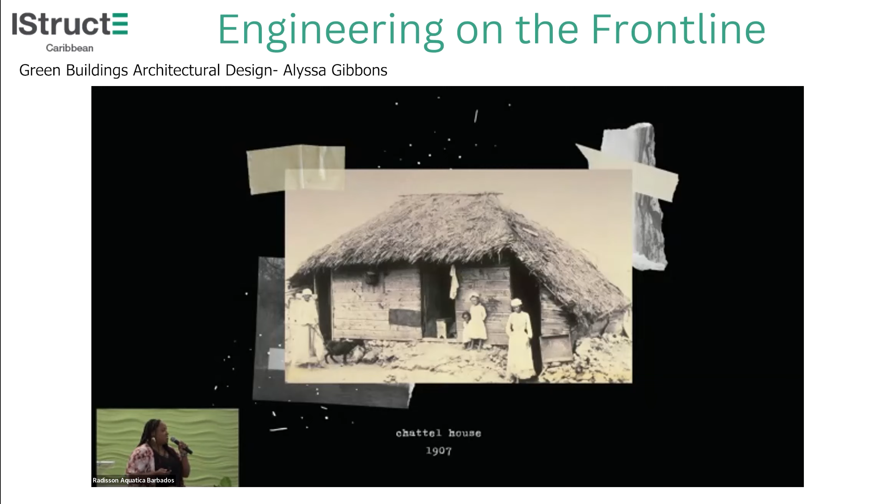Some of the earliest examples we have of these on the island are chattel houses. Originally, I think we're all aware of slavery etc, but what these houses represent to me is the absolute resilience of Caribbean people by nature. Faced with excruciating circumstances, they found a way to simply survive, right?

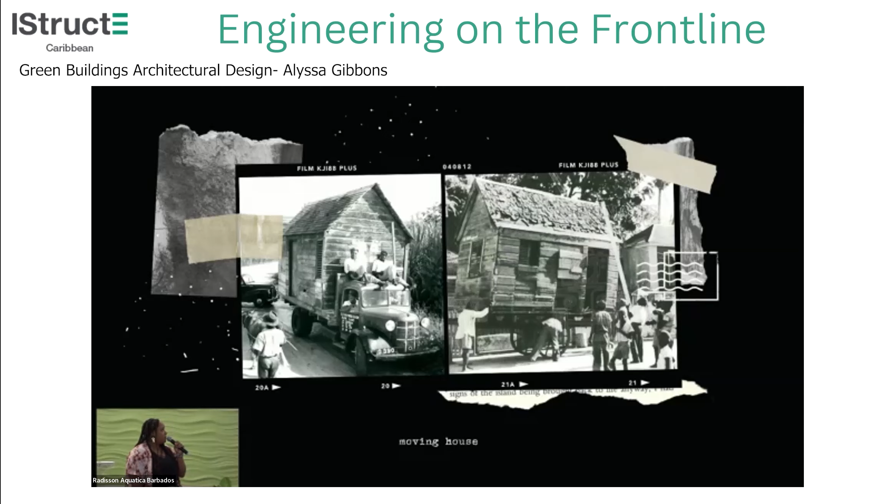Originally, these chattel houses had this kind of conundrum they had to deal with. They needed to withstand hurricanes, tropical weather, but in many circumstances, after the abolition of slavery, they needed to be movable. It's one of the earliest typologies of movable tiny home. You needed to be able to call a friend and pack up and leave if you were in danger. So how do you marry resilience and robustness against weather, but still have that kind of flat pack mentality and ability to move at a moment's notice?

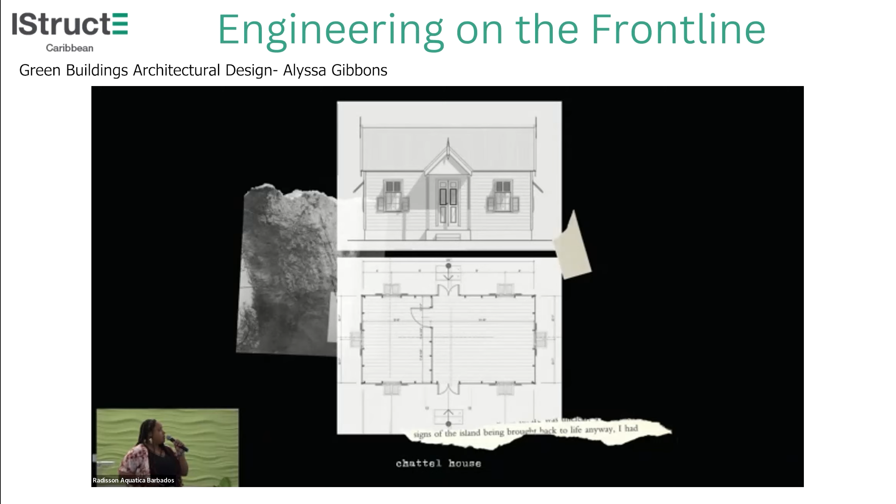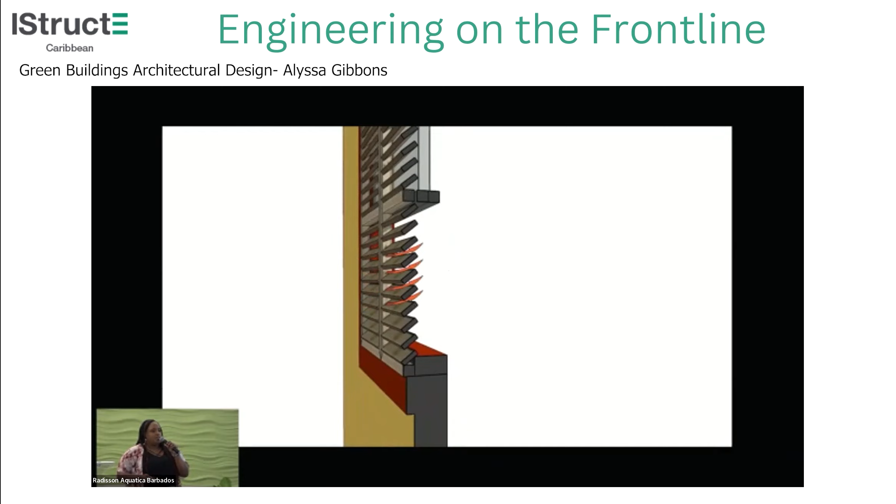Well, as many of us probably know, the answer lies in the arrangement of the timber facade, with windows and door openings and louvered apertures that allowed wind to actually enter the building. So by arranging these openings in a symmetrical way, you'd literally be able to open up the house to the elements and allow the strong forces of the wind to pass through. So like I said originally, it's about not trying to defy nature, and in many cases where they simply didn't have resources to withstand nature, they simply made some compromises and allowed nature to enter.

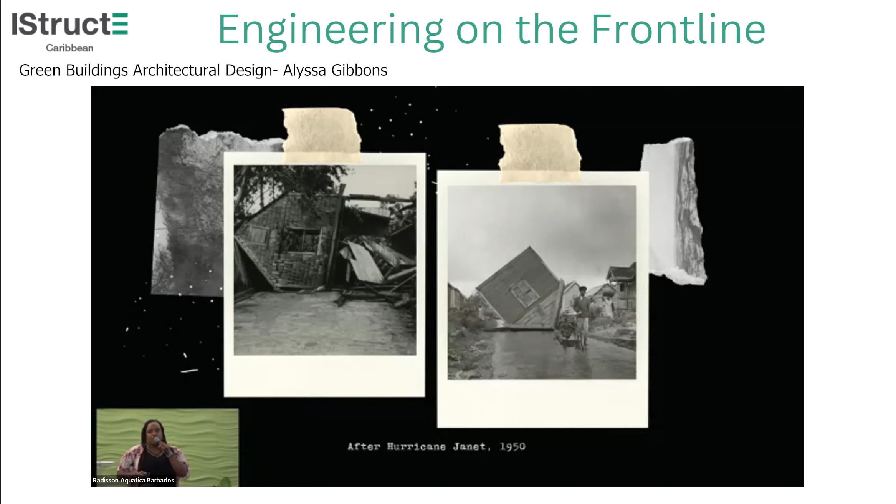So if that ability to work with nature rather than against it is the first rule of sustainability, then what is the second? I think for us in a Caribbean context, we cannot have this conversation of green architecture or green design or sustainable design without including resilience. For us in a hurricane-prone area, sustainability and resilience really do mean the same thing.

Case in point, drawing on these principles as a designer, doing your precedent studies, your research, there are opportunities that pop up where you get to integrate some of these design principles and understanding. This is a project that I'm going to talk to you about, probably my favorite project I've ever worked on, and it's located in Dominica.

I think when we think about green and sustainable, this is what we think about: flora, fauna, beautiful imagery of Earth at its best, but we also need to design for Earth at its worst.

Following on from, I think Ms. Alara mentioned Hurricane Maria in 2017, I was working in St. Kitts at the time, and there were a couple hurricanes in the area at the time. Working on St. Kitts, we got affected by one of them, and a lot of the islands around us were flattened, but luckily we were safe.

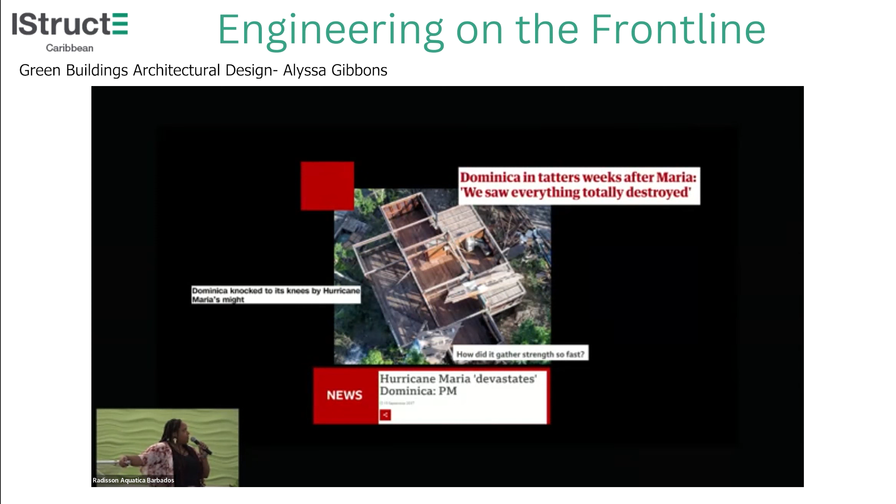So when I got there, I dived right in on site with the structural engineers, with the client, with the contractors, trying to understand what they needed, what didn't work, and how do we reimagine this space into something that could withstand another hurricane like that one.

I think this could have been done digitally, with drone and aerial imagery, with LiDAR to understand the rock face of the site and the tectonics of the area. But there's always that human aspect that you cannot digitize. So it was super important to go there and have the conversations on site with people with local knowledge and build a solution from that.

So some of these images here are just simple sketches done on site, either using somebody's helmet to press on, or the palm of your hand to sketch out ideas, alongside the client, alongside the structural engineer. Just coming up with ideas of how do we integrate simple design principles that are low tech, that the guys on site, the survivors of the area, can integrate into their architecture moving forward.

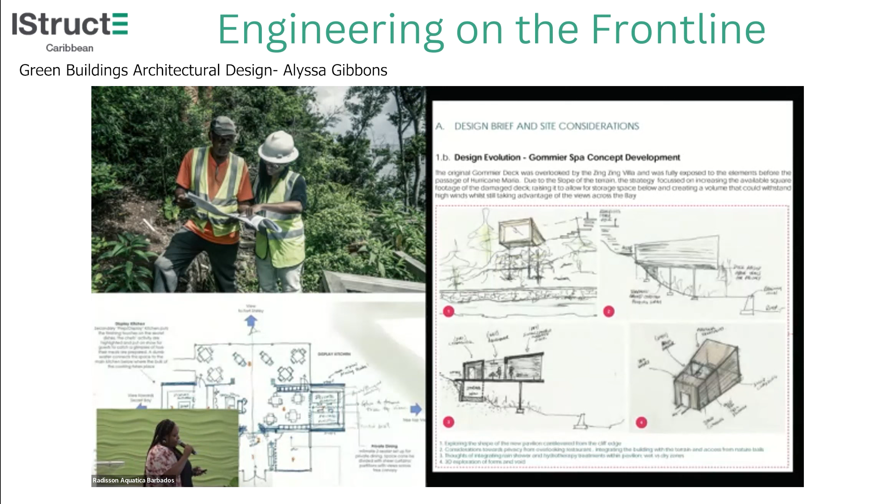So, Zing Zing Restaurant and Gommier Spa were two interventions that I led. Super simple, based on those ideas that we learned about traditional vernacular, this idea of letting wind into the building if you don't have the resources to shore yourself up against it. We came up with this idea of what we call a sacrificial core.

So in this building at the top level, we're talking about Zing Zing Restaurant here, we came up with the idea of having these two lockdown zones that were both watertight, structurally sound, and allowing the central core of the building that you see in the image to the right to take wind through the building in the event of high wind. So in the event of a hurricane, for example, the client would be able to take all of the furniture, place them into those lockdown zones, and bunker in the ground floor area that you see there, which would be kitted out with cold storage, bathroom facilities, etc.

I think one of the things that is becoming more prevalent now is lack of warning. Just last year, in July I believe, we had that freak storm where we lost almost 2,000 homes and we had no warning. So this ability to integrate resilience measures into simple buildings so that people can shelter in place is super critical.

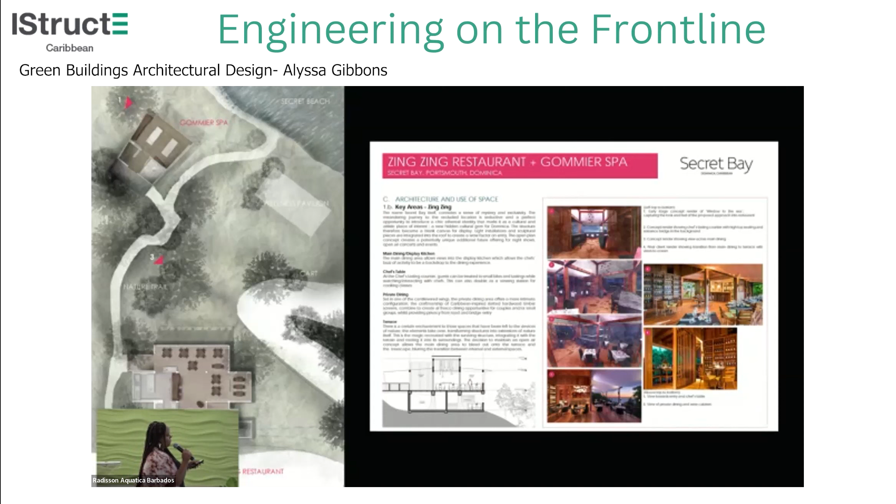Here we go, and in true architectural form, just some pretty pictures. But you can start to see here how we solve some of these issues: on the ground floor we had 2 cantilevered beams into columns. So it was kind of a 4-beam configuration coming into 2 columns, and the entire building cantilevered around that platform, with areas that jutted out into the surrounding tree canopy.

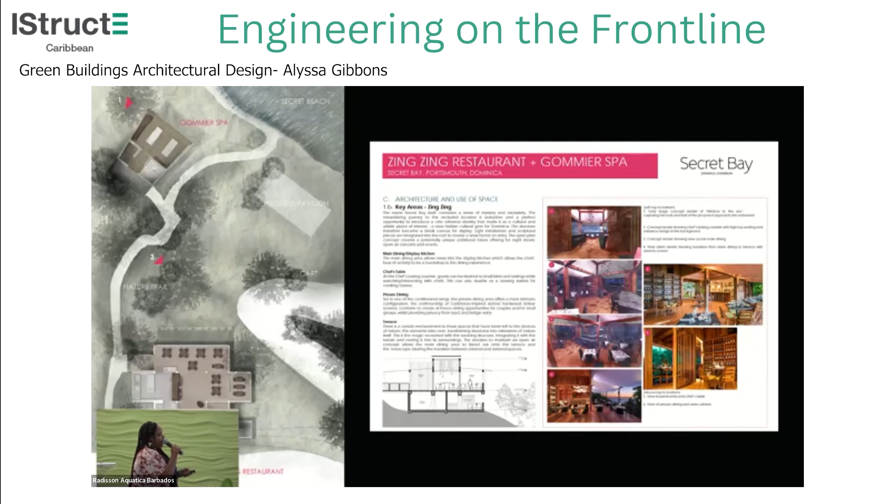And then in terms of air quality, natural ventilation, passive cooling, integrating that louvered element into the central core of the building so that as wind passed through, it had plenty of opportunity to get through the building, up and out of the building for cooling as well.

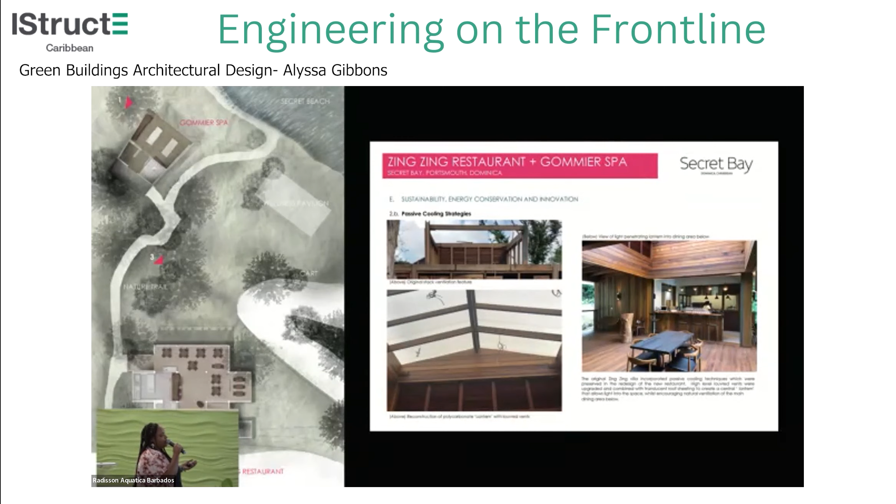And similarly, the spa building—the client really wanted to integrate some amenity spaces throughout the resort. So we walked the site with the structural engineer, choosing a location based on their knowledge of the rock face, examining, designing, pinning the structure back to the rock, and designing a simple cantilever solution. This was not about doing something super beautiful or stroking anyone's ego. It was about giving a tight footprint, something that worked and was elegant but still restrained.

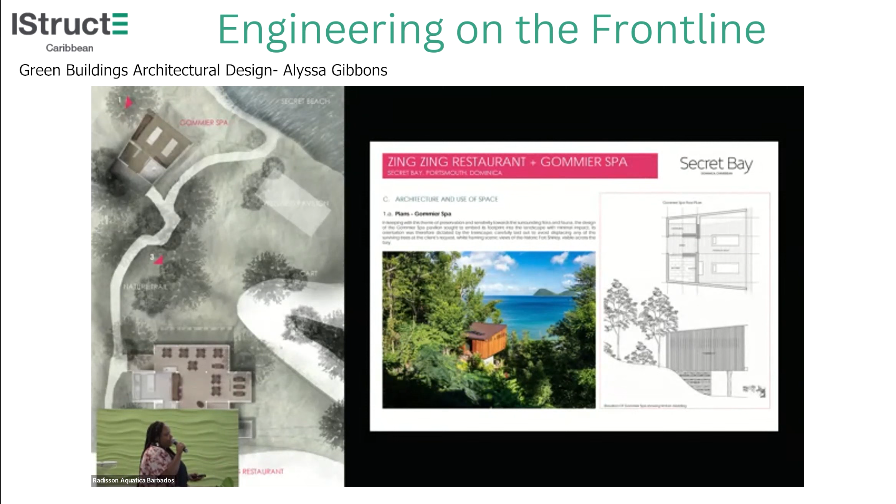Some more internal imagery, but you can start to see the solution at the bottom where we cut into the rock—again, a simple cantilever solution. Those two bunker spaces off to the top and bottom in the drawing on the far right allowed the client to store away any massage tables or amenities, and a bunker space at the bottom if they had high wind gusts or high rain and needed to shelter in place.

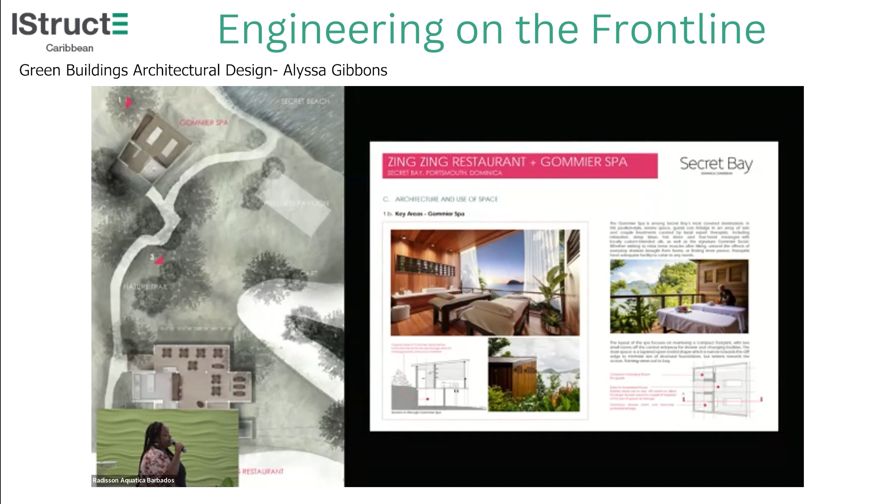Speaking more about materiality, I think something that goes untalked about sometimes is the greenness of a building and how we tackle that issue through use of materiality. Obviously after the hurricane there were a lot of felled trees, and we wanted to reuse them in some way, whether for cladded elements, structural elements, or simple furnishings within the space.

So we ended up using some of the timber for cladding. We used it for bar tops and even the hostess station within the restaurant. That in itself was an interesting exercise—climbing on top of these big trees and directing people exactly where to cut, people offering you things to smoke, and you trying to do your job.

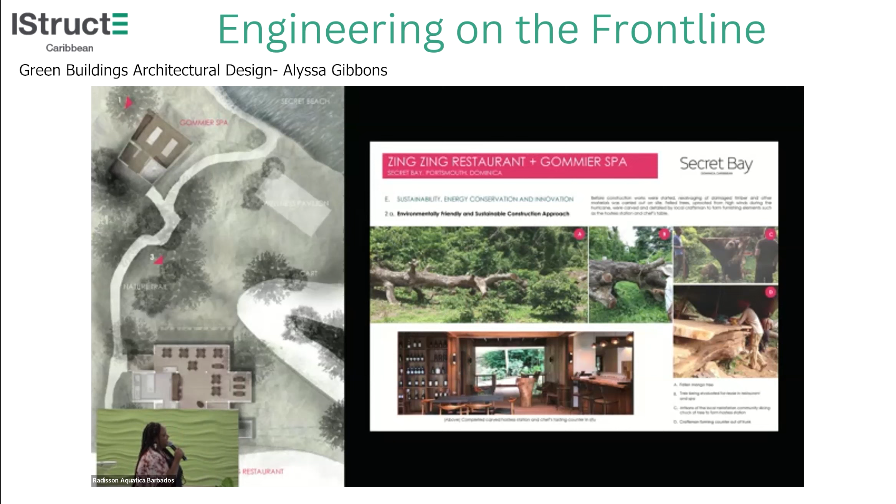And this is what you come up with.

What you see there are these timber fins that shoot over the glass of the windows in the building, intentionally done to allow light to penetrate into key areas like display kitchen spaces, but also to help protect the glass from wind-driven missiles. It also helps to break up some of the wind force against the building, so it never gets enough purchase to totally knock the building over.

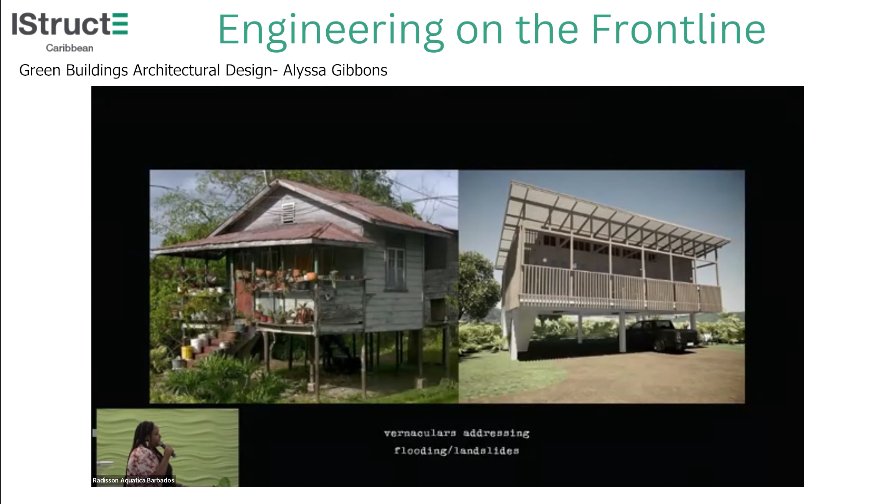This approach of taking traditional typologies and applying them to slightly more modern designs is not unique to Barbados. We do it throughout the Caribbean, from Trinidad, South and Central America, dealing with flooding and landslides, elevating structures on stilts, and addressing issues like seismic activity. The gingerbread houses in Haiti are a great example of this.

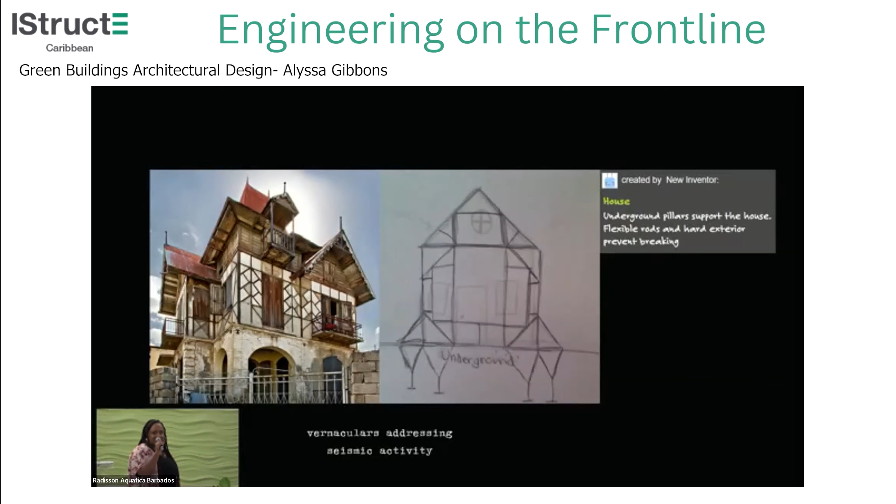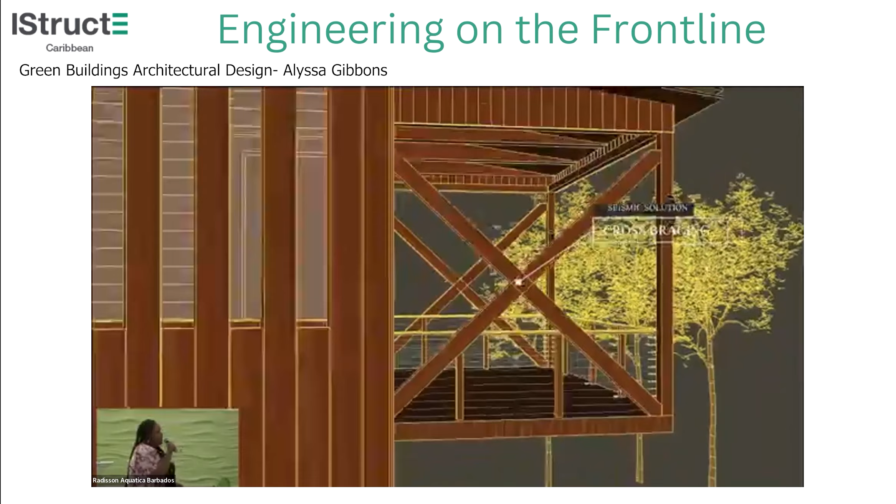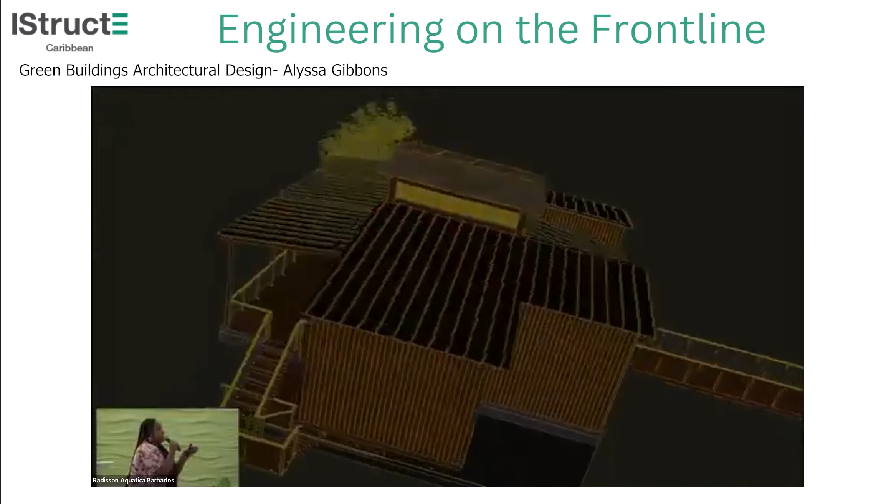Now, I've spoken from a very analog point of view, but a lot of my work is digital as well—what we used to call building information management or modeling, but it's really digital twin construction, where instead of discretizing elements, you literally create a virtual twin of the building in virtual reality. I can't stress enough how important this has become to my job, because it allows me to test—test in an environment where there's no loss of human life, no damage to critical infrastructure. It allows me to fail, tweak, and optimize a building till I get it right, or as close to right as I think it can be.

Within that virtual environment, you can start to run simulations for disaster preparedness, run simulations for Category 5 hurricanes. No, we're not God, but a lot of my work to date has been about attempting to take the guesswork out of building performance. As a designer, quite frankly, I could care less about how pretty a building is if it doesn't perform.

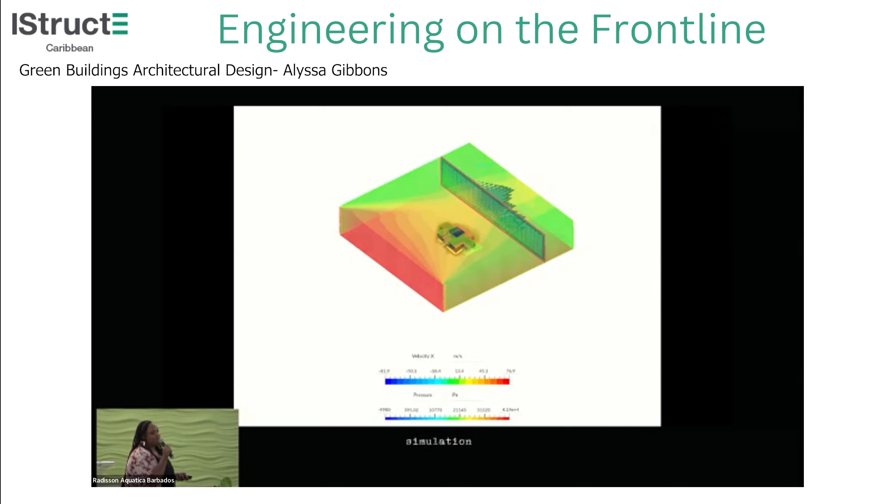But it helps if it looks good. We're at a point now where it's not just about the aesthetics of the building or the structural performance, but also the energy analysis. So having that digital twin, I can apply metadata to each element so that I know the carbon footprint of it, the embodied carbon, the energy performance, the specification of the materials, whether it's a phase change material, how it performs under different radiant exposure. And the added value of that is I can do trade-off analysis.

So as a client, you might say to me, I don't care about daylight in my office space, which is a poor stance to have. But if you decided to do a cost analysis of that versus the sizing of your HVAC system or the sizing of your PV array on the roof, then we can make really informed decisions and decide where we want to spend money, where we're okay with paring back, and decide what we want the final performance of the building to be.

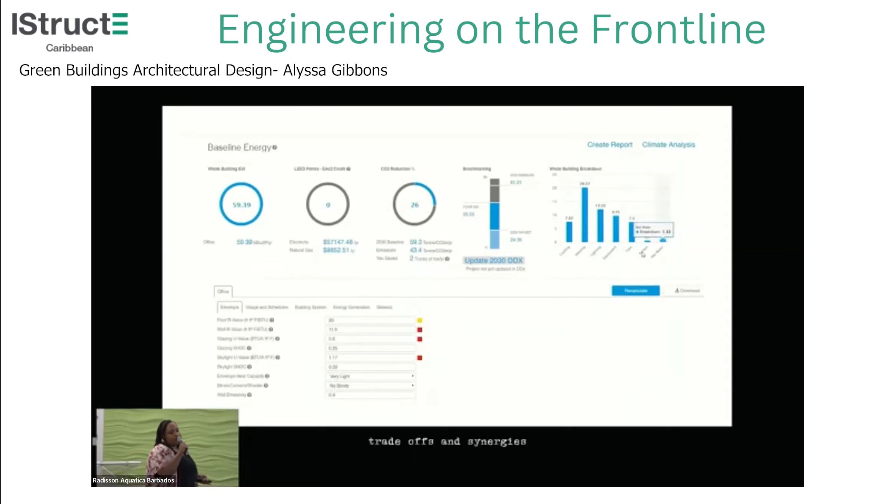Coordination and clash detection is another huge benefit of digital twin construction, because rather than having arguments about where to put the stairs or where to put the columns and beams, preferably not in the landing, conversations I've had before with lovely people such as yourself, we could see these real time in 3D at a meeting, not waste a lot of time arguing about what should be simple things, and make a decision. Move the column or not, move the stairs maybe, but actually decide where we want to put our openings. Make sure that the MEP conduits, pipes, sewage are not running through what's supposed to be a structural column. And then I don't have contractors on site cutting holes in what makes a building stand up.

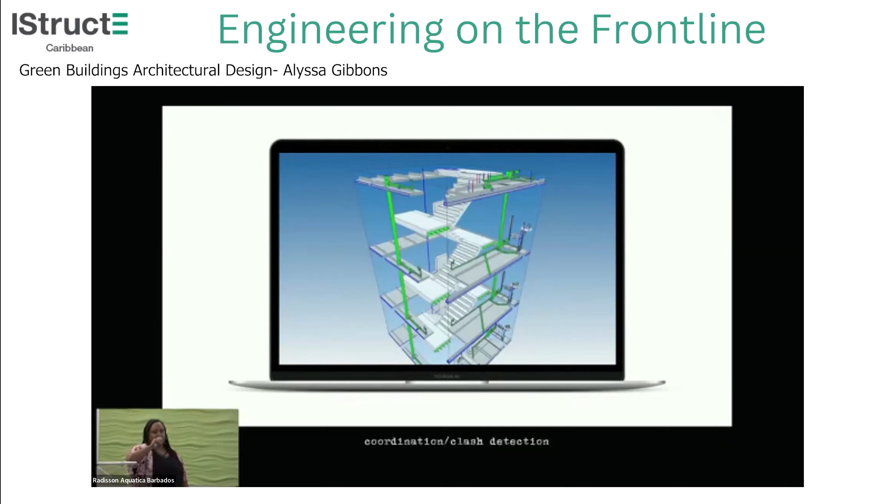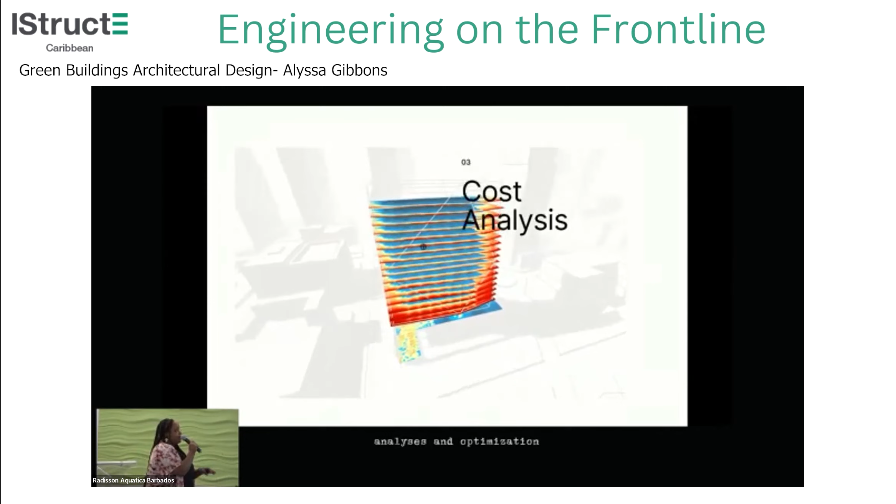Yeah, so I talked a little bit about some of the simulations that we can run, but they're infinite. Cost analysis is important, but I think the future of the industry right now, the trends that I'm seeing, is definitely in decarbonization. I think we're still having conversations about sustainability, energy efficiency, building performance, but I think decarbonization is becoming super critical to the conversations, not just for architects, but engineers as well.

And you can see why. If you look at the embodied carbon of building elements, structure and support structure actually takes up quite a bit of that. We can design a building to death, we can kit it out with PV, we can fool ourselves into thinking that we're being energy efficient, but it's about reduce, reuse, recycle - this is the reduce part. We talk a lot about net zero, but if you're overusing and overcompensating, that's still net zero, right? You need to reduce first, be as efficient as you can first, and a lot of that comes from something as simple as orientating the building in the correct way. And that conversation happens between architects, engineers, client, at the initial design charrette, hopefully where everyone is sat together thinking about how to make this holistically the best building possible.

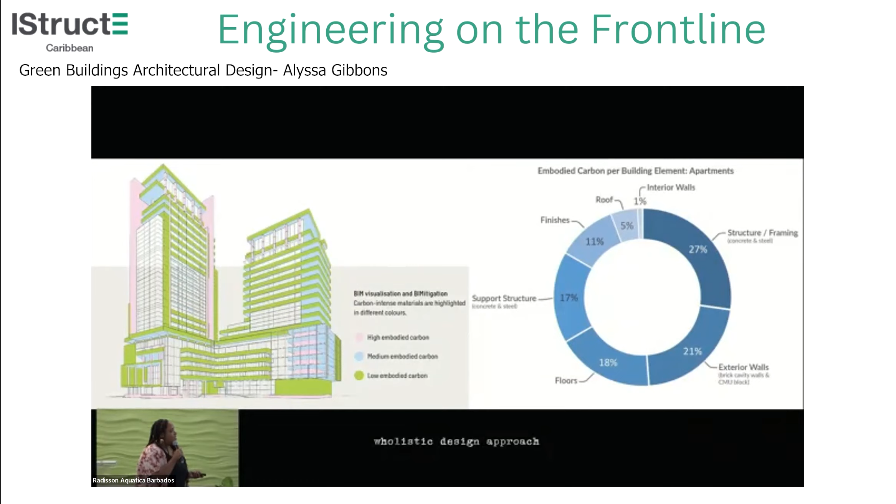And I think that's it. Oh, one more. But yes, I think, just tying it back into what I said earlier, we've been on Earth for quite some time, and we've survived as a species to this point. That's not always by luck, it's by intention. We know, for the most part, what has worked for us before. We see it in our culture, we have examples of it. And I think as we look towards this uncertain future, we need to design with the past in mind, and design not just hoping for the best, but based on our past experiences, designing for the absolute worst. Thank you.